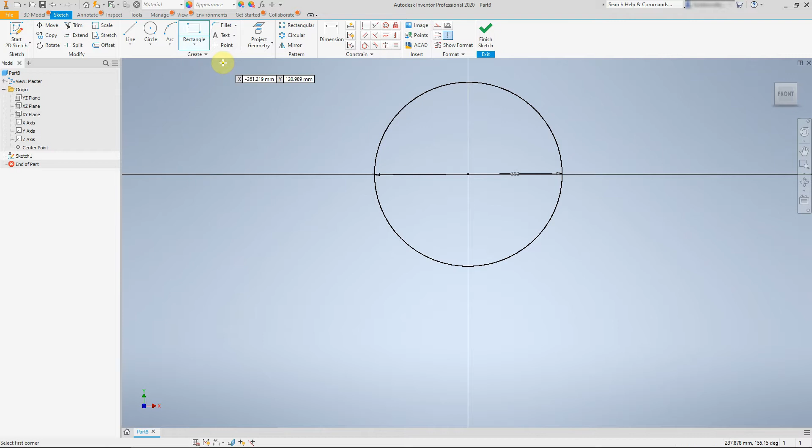Take a normal 2-point rectangle from the rectangle drop-down menu, and from the center origin of the circle, draw down onto one side of the circle. Don't worry about sizes just yet.

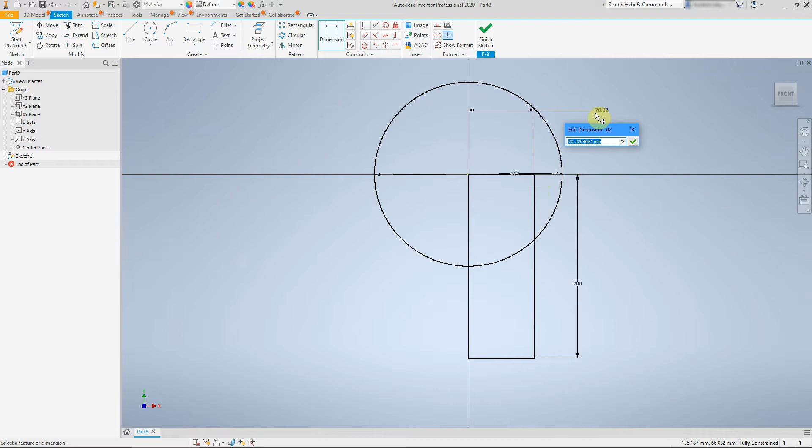Take the dimension tool, and from the center origin of the circle to the bottom of the rectangle, set the height to 200mm. Again, from the center origin of the circle to the right hand side of the rectangle, set the width, or what will eventually become the radius, to 40mm.

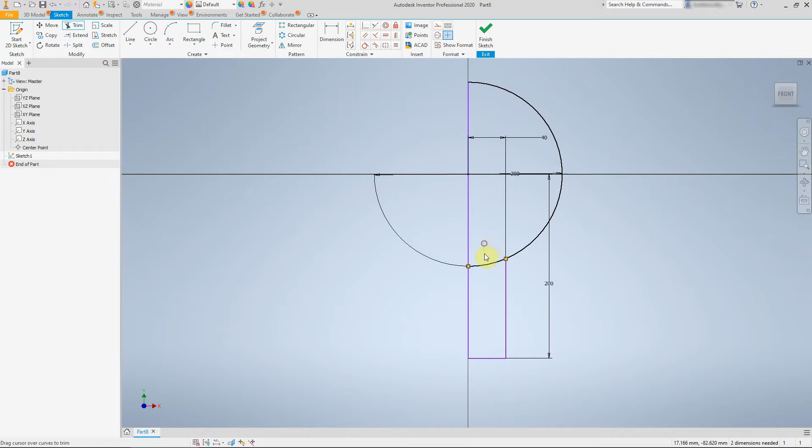Extend the center vertical line of the rectangle till it touches the top of the circle. Select the trim tool and trim away half the circle and trim away the rectangle that's within this semicircle. Trim away the remaining part of the semicircle which connects it to the rectangle to form one valid profile.

Select the fillet command and set the radius to 20mm and fillet the curve to the vertical line. Select Finish Sketch and use the Revolve Profile tool to revolve this profile around the center axis.

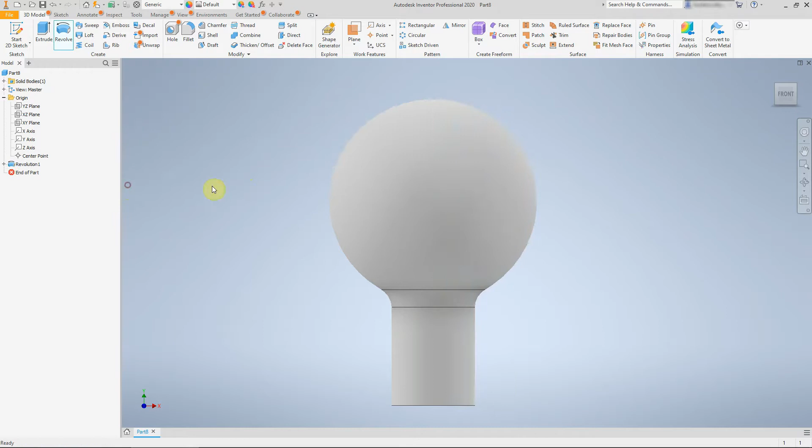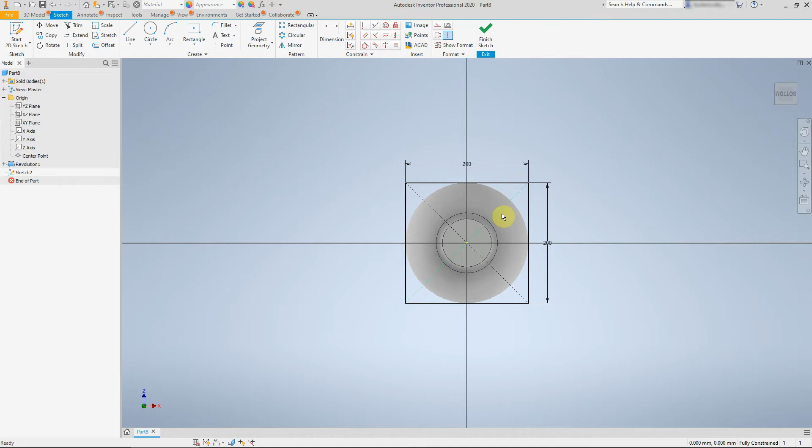We're now going to do the square plate at the bottom of the cylinder. To do that, click Start 2D Sketch and click on the bottom face of the cylinder. Select a 2-point center rectangle from the rectangle drop-down menu and draw a square of 200mm by 200mm. At this stage, we're also going to add in the holes for the screws or bolts.

Select the circle tool, and on the diagonal construction line of the square, draw a circle of 20mm diameter. Take the dimension tool, and from the top of the square to the center of the circle, set the size to 30mm. The circle should move diagonally.

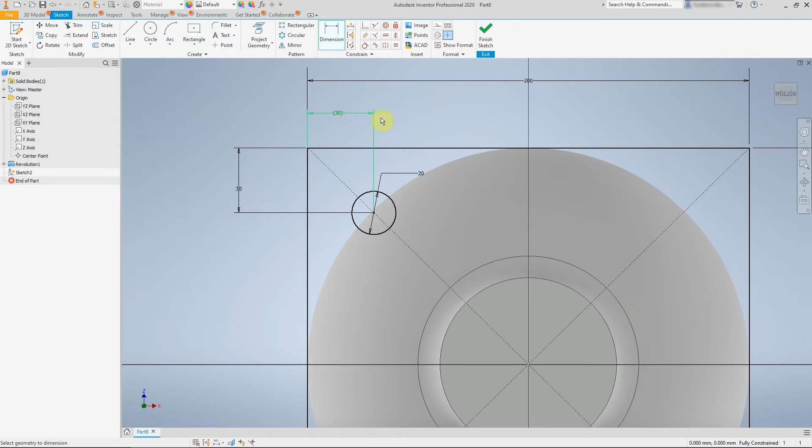If you measure this circle from the center to the side now, you'll also note it reports at 30mm, the correct size. If you drop this dimension, it will report it as over-constrained. That's because this construction line is at 45 degrees, and we've already set the distance from the top edge at 30mm. This means it automatically has to be 30mm across the horizontal also.

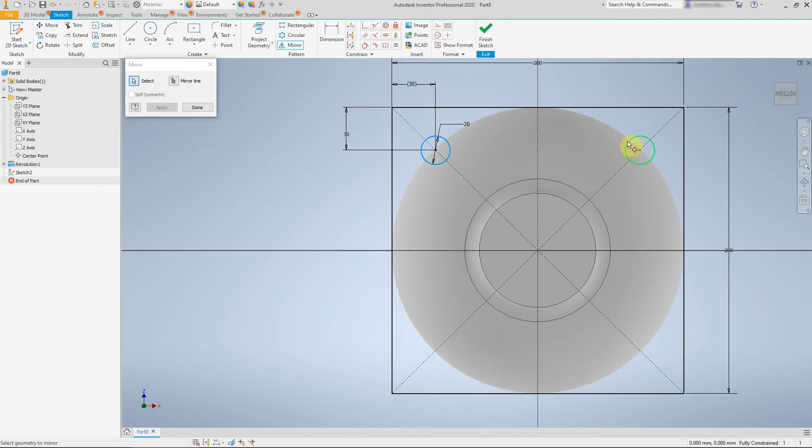We could redraw this circle a further 3 times using the same technique, but to make our lives easier, we can take a straight line. For construction, draw a line vertically to act as a line of symmetry, and a line horizontally to act as a line of symmetry. We're going to select the mirror tool and mirror this circle across the vertical line to begin with, and then use the mirror command again to select these 2 circles and mirror them across the horizontal line.

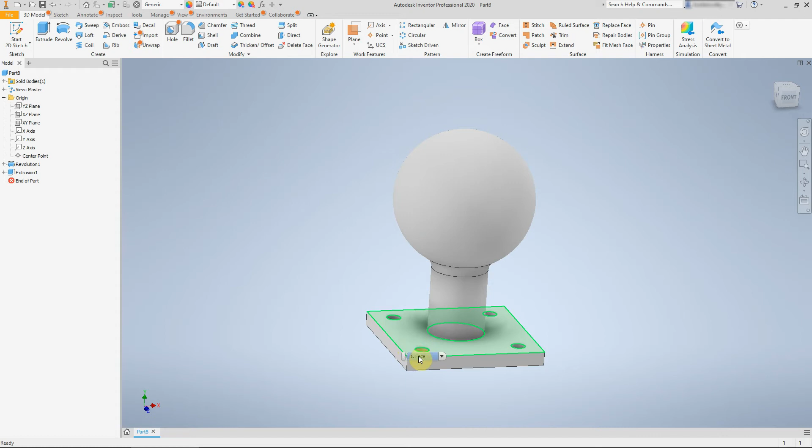Finish this sketch and extrude this profile 20mm. Make sure you're extruding it down the way and not symmetrically or up. Press OK. We're now going to add the web components which connect the cylinder and the base. Webs are special components we add to strengthen things if they're going to be under any stress or strain.

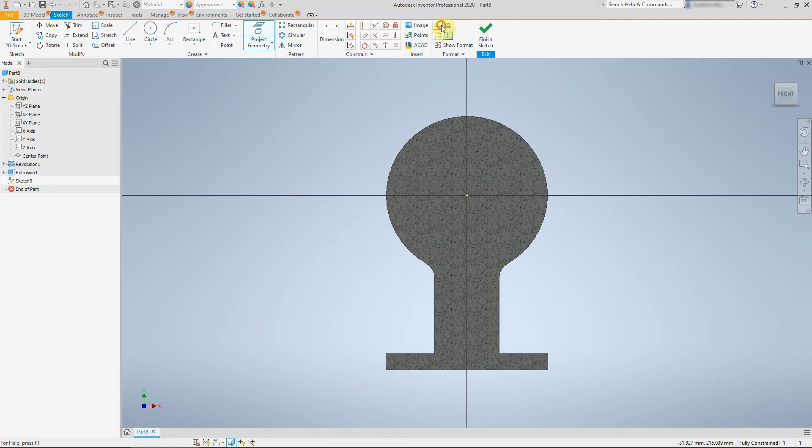To do that, create a sketch in XY work plane and press F7 or function 7 key on your keyboard to create a temporary sectional view. Select Project Geometry and make the projected geometry for construction. Select the bottom edge and the vertical edge of the cylinder.

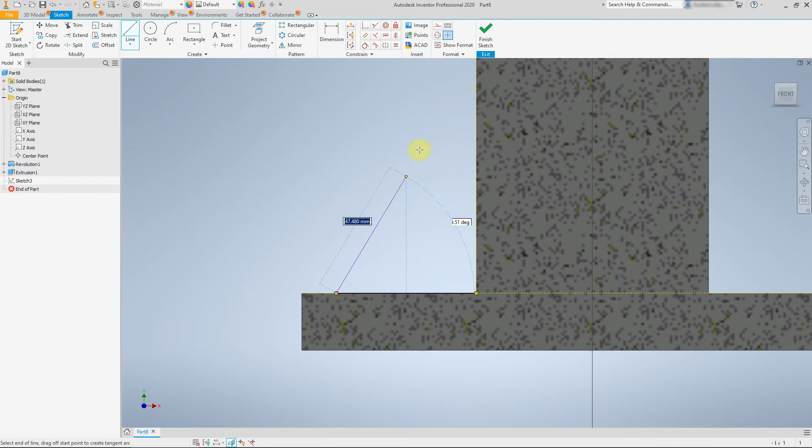Take a straight line tool, but this time not for construction, and from the corner of where the base plate and the cylinder meet, draw a line out horizontally. Don't worry about the size just yet, just stop before the edge of the base plate. From the end of this line, draw a line diagonally up towards the cylinder. Again, don't worry about the sizes just yet. And from the top of this line, back down to where we started.

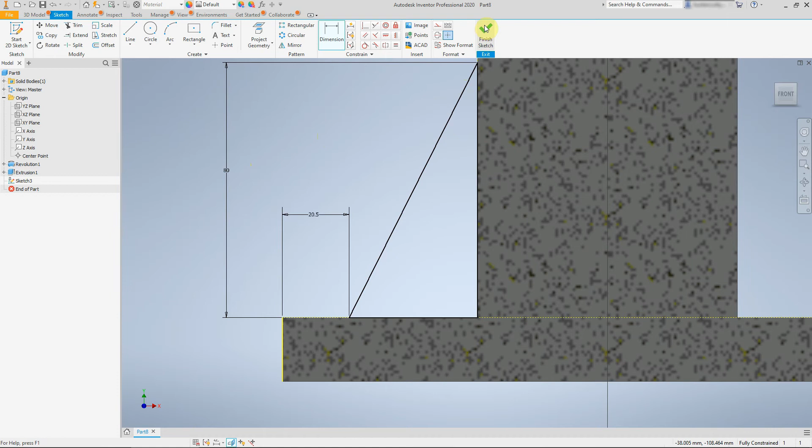Take the dimension tool, and from the corner vertex of the triangle to the edge of the base plate, make the distance 20.5mm. From the top of the base plate to the top corner vertex of the triangle, make the distance 80mm. Finish this sketch and select Extrude. Extrude this symmetrically 10mm.

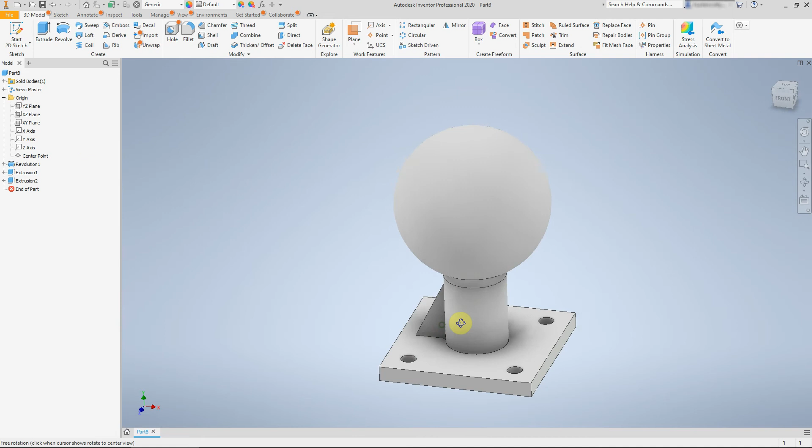Select OK. It is possible now to use the same technique to redraw this a further 3 times round the cylinder, but to make our lives easier, we're going to select this feature and use the circular array tool to array this around the y-axis. Array this 4 times.

We're now going to add the chamfers to the bolt holes and the chamfers to the corners of the base plate. To do this, select the chamfer tool and we'll start with the holes. Select the tops of these holes and this will create a countersink that the screw or bolt heads can fit into. Make the setback distance 5mm. The software will automatically default to 45 degrees.

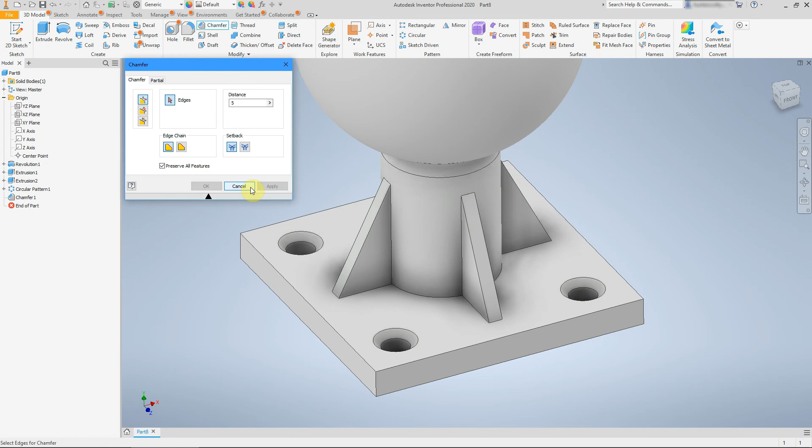Select Apply. Now select the corners of this base plate. Set the setback distance for this at 20mm. Again, 45 degrees is automatic. We've now completed this component. It is ready for assembly with the other component and technical or engineering drawings. Well done.